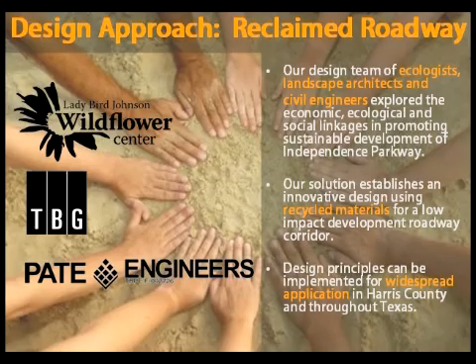There are three integrated principles we followed through this design: a focus on water through low-impact development, a focus on place through context-sensitive solutions, and a focus on sustainable materials through transferable, renewable technology.

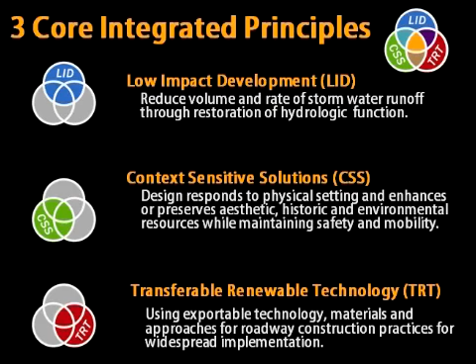The LID element of our design creates a broad vegetated median that restores natural biofiltration services to the soil. Our solution improves water quality and increases detention capacity. It increases soil porosity and infiltration rates through the use of recycled materials. It minimizes the use of pipe conveyance for stormwater and reduces outfall depth requirements.

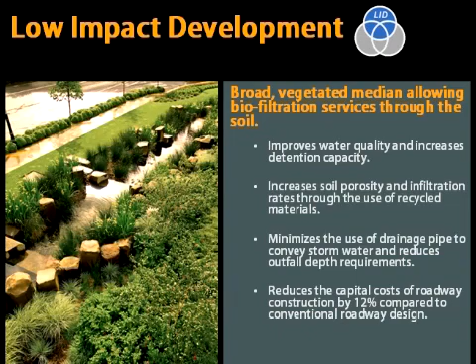And this is going to save the county money as well, by reducing the capital costs of roadway construction by 12% compared to conventional roadway design.

Specific to the project site along Independence Parkway, our landscape design responds to the cultural and historical context by incorporating interpretive design elements relating to the adjacent San Jacinto battleground. Ecologically, the design restores the coastal prairie setting with large open fields scattered with tree clusters and broad swaths of individual native plant beds.

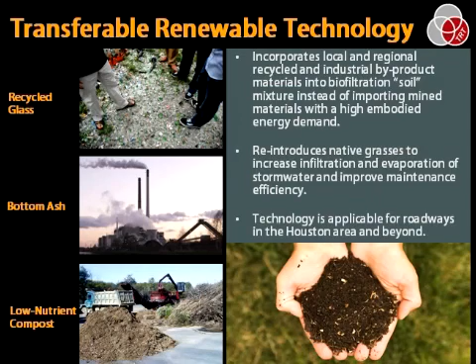Our design focuses on materials that are typically waste products, but that could be recycled for beneficial reuse. For the biofiltration mixture that provides primary stormwater treatment, we have used a mixture of recycled glass, coal bottom ash, rice hull ash, and low nutrient compost to create a filtration media which will provide both a high infiltration rate as well as form an excellent growing media for the selective native plants.

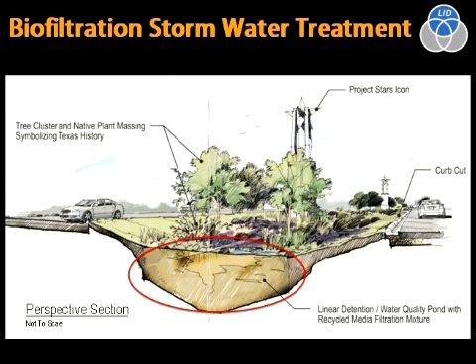This biofiltration media forms the bulk of the soil in the roadway median to create a linear series of biofiltration areas and detention ponds. Treated water is conveyed to the outfall by moving through the media itself rather than through a pipe. Initial testing at the Wildflower Center demonstrated that a mixture of these four materials had an infiltration rate of 30 feet per day and a void space of 42%.

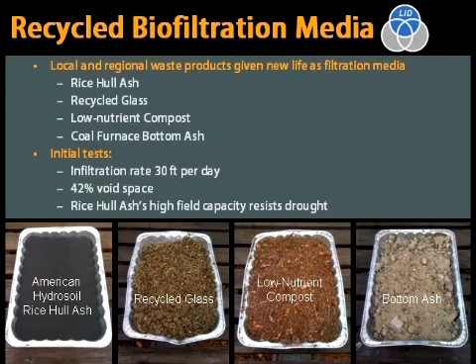The high field capacity of this mixture, particularly the rice hull ash, makes it a valuable soil amendment for plants during drought periods. Unlike sand, a mined material often used in filtration media, the biofiltration media gives new life to local waste products. Plant roots will maintain media porosity over time and will extend the functional life of the filter media.

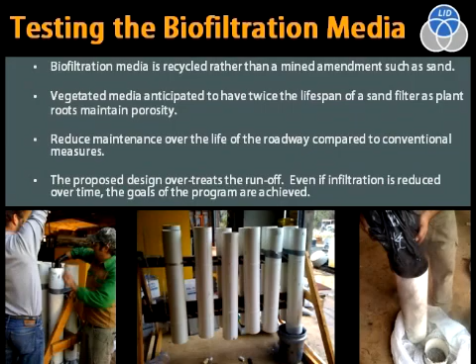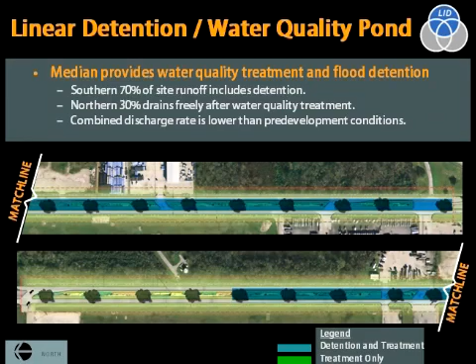Additionally, our design overtreats the runoff, so even if infiltration is reduced over time, the goals of the program are still achieved. Detention occurs in the southern 70% of the site, with median breaks acting as hydraulic grade control structures. Overall, the entire roadway has a runoff rate 30% below the background condition of no road.

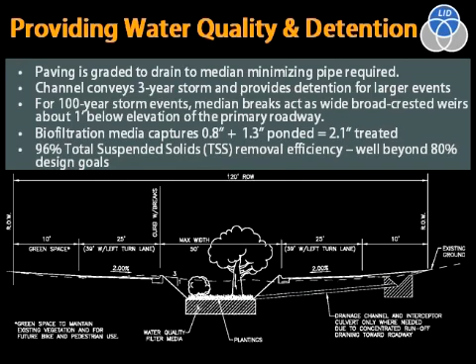Rainfall falling on the roadway, as well as run-on from adjacent sites, is directed to the median for detention and treatment. An overflow culvert with a flow line above the water quality volume allows for conveyance of a 3-year storm event and detention of larger events.

Turning lanes act as broad-crested weirs to convey floodwater in extreme events while keeping the primary driving lanes safely free of floodwater even in a 100-year storm.

The biofiltration media captures over 0.8 of an inch of stormwater runoff, and the design ponds an additional 1.3 inches of runoff for later treatment. This provides a total treatment for the first 2.1 inches of rainfall on the roadway to a 96% removal efficiency for total suspended solids.

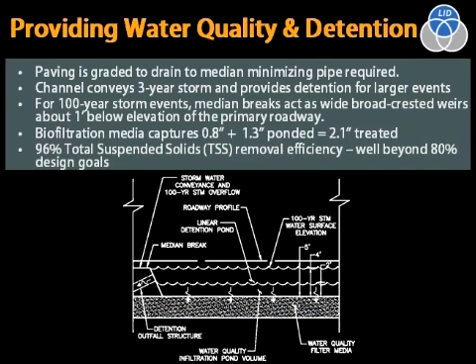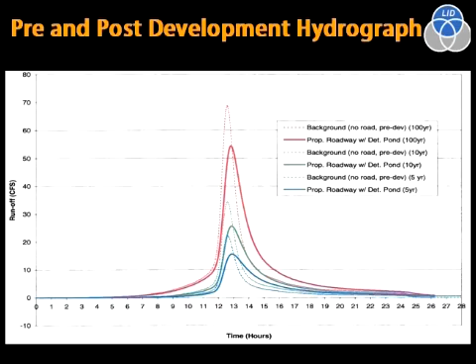When you compare the proposed design to the background condition of no road whatsoever, this design reduces the flow rate of runoff leaving the roadway by approximately 30%. This results in an overall decreased flooding potential while increasing traffic capacity.

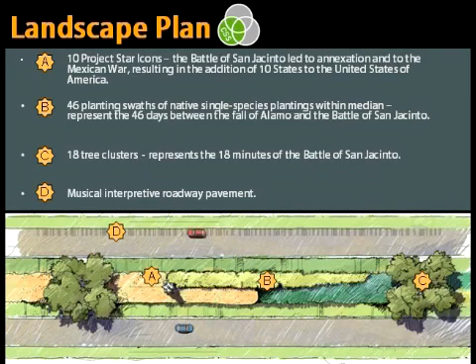And then there's my favorite, the musical interpretive roadway pavement. The northbound lane of Independence Parkway is the route that the Texas Republic forces traveled as they made their way to battle. Along with cries of 'Remember the Alamo' and 'Remember Goliad,' a drummer provided cadence by playing the beat from the popular song of the day, 'Will You Come to the Bower?'

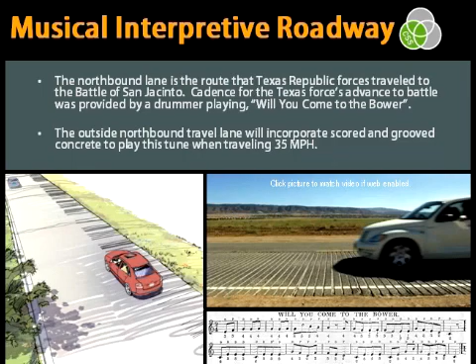The outside northbound travel lane of the parkway will incorporate scored and grooved concrete to play this tune when traveling at approximately 35 miles per hour.

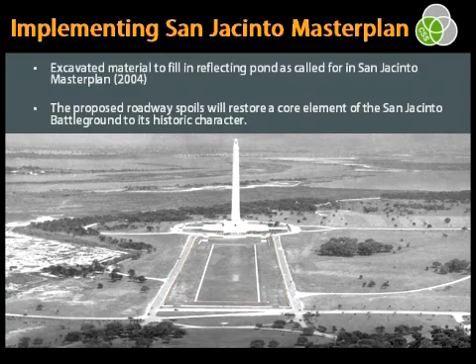As with many Harris County roadways, this project will result in excavated material haul-off. We plan to use that material less than 2 miles away by filling in the reflecting pond at the monument as recommended in the San Jacinto Master Plan Guidelines in 2004. This allows the site to better emulate the conditions as they existed during the battle.

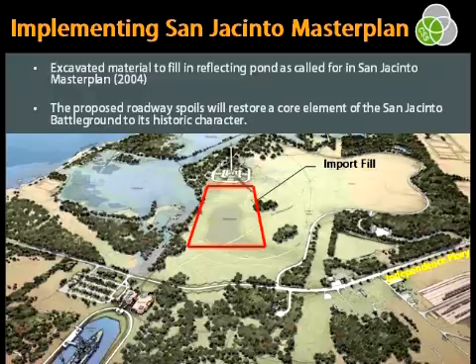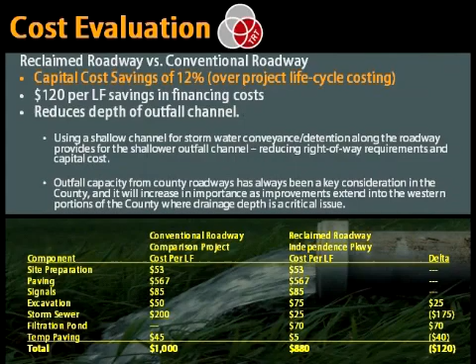The Reclaimed Roadway project is projected to have a capital cost savings of 12% when compared to conventional roadway construction. Assuming bond financing, the realized savings in financing cost is $120 per linear foot. Additionally, our design concept substantially reduces the depth required for the outfall channel, saving additional funds in easements and excavation.

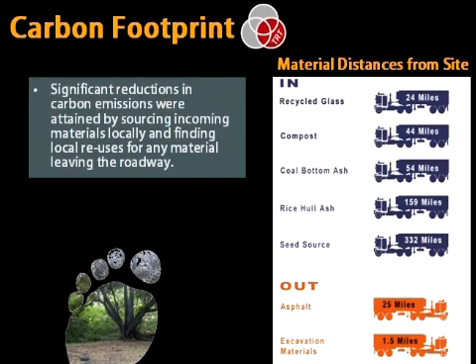The primary materials used in this project are all from local sources, and our disposal sites for all outgoing materials are within 25 miles. Ecosystem services are those benefits that the environment provides to humans for free, which humans would have to find other ways to provide for ourselves if they did not occur naturally.

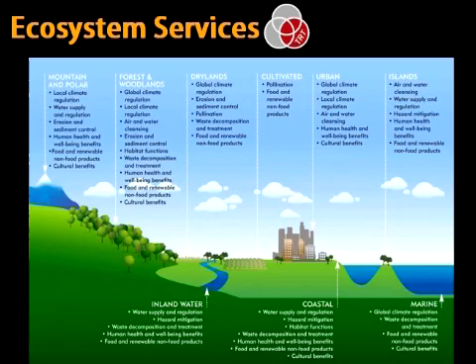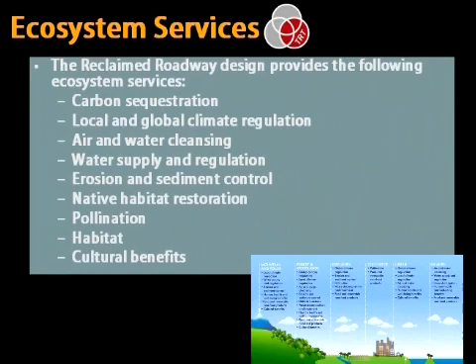Luckily, these services can occur not only in the wilderness, but also in urban, suburban, and rural areas. Our design provides a host of ecosystem services for the site in Harris County, such as carbon sequestration, water cleansing, water supply regulation, and native habitat.

The Sustainable Sites Initiative is a newly released rating system for landscape sustainability, developed by the Wildflower Center, the American Society of Landscape Architects, and the U.S. Botanic Garden, along with a host of other partners from around the nation. Using this rating system, our design concept for Independence Parkway will achieve 155 points, earning it 3 out of a potential 4 stars. It is the union of ecological, social, and economic goals that makes our design sustainable.

By focusing on low-impact development, context-sensitive solutions, and transferable renewable technology, we have ensured that this roadway will exceed the goals set for it and provide an effective model for future roadway development across Harris County and indeed the rest of the state.